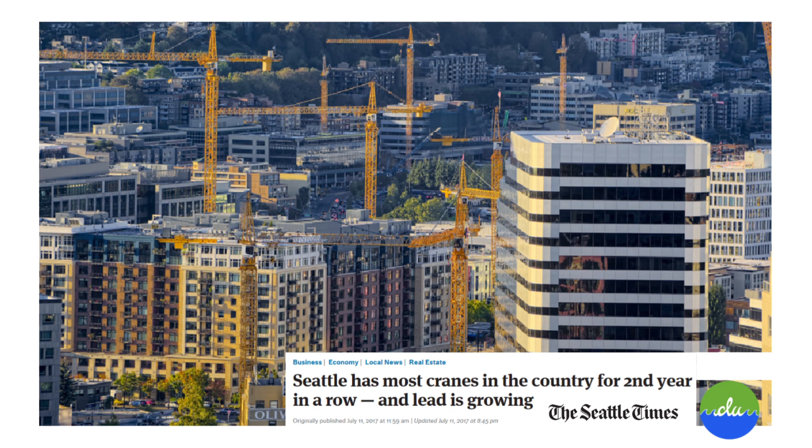This is right by my office. There's a marina there and you can see the oil slick in the water. As part of running that marina, we have to have a best marina management plan. We saw that oil on the water and we're like, what is going on, where did this come from? Get our spill kits out. We thought an engine was leaking.

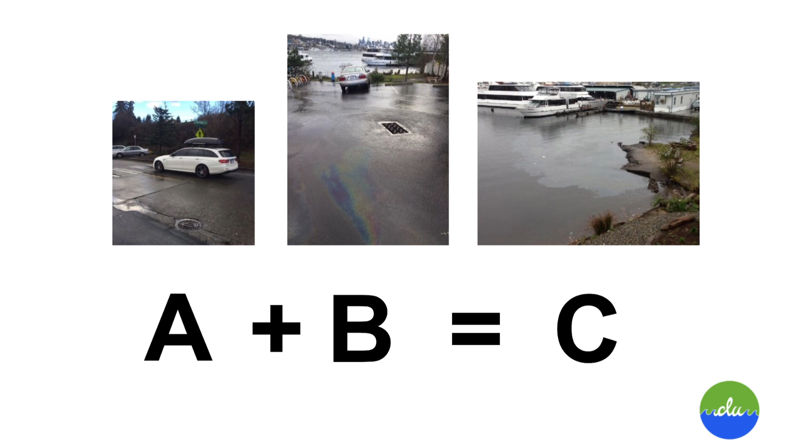We came to find out that it wasn't an engine leaking, it was stormwater. This is as simple as it gets, but you can see the storm drain was doing what it was supposed to. Unfortunately, there's no filtration in these stormwater systems. This drain right by the office, you can see the oil slick going into the drain, and then the water in the background, that's the oil slick from that water. With all the development going on, we knew that there was a problem.

Jeremy, this is back in 2013, probably 2012, said, hey Mark, you should look at this video. Jen McIntyre, she's a professor at WSU, and in the video, without going into it, they were taking stormwater off the 520 bridge and sticking juvenile salmon in that stormwater. The salmon would die within minutes, just because of how much toxic material is in that stormwater. Jeremy said, what can we do about this?

This is an email from Jeremy to me, October 28th, 2014. It just says, I know it might be a long shot, but please send me a photo of any dimensions. Seattle also has, in addition to a stormwater problem, combined sewer overflow. Our pipes in the city of Seattle are really old, 80, 100 years old, and they haven't changed. You saw those cranes, we've added a lot more development, so there's a lot more sewage going into those pipes, and when it's combined with stormwater...

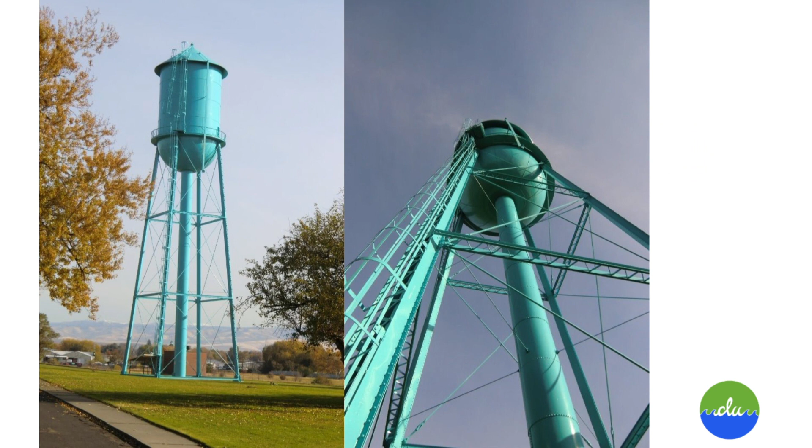you've got a problem. In our development project, this is that water tower we were talking about. We were going to build a building and cut off the legs of this water tower that was going to be demolished, paint the top of it pink, put it right next to the Aurora Bridge, and hold the stormwater coming off the Aurora Bridge in this tank. While it rained really heavy, that overflow water is what makes sewage go into Lake Union, because our pipe is the same size. The rainfall's pretty consistent, we've added all this development, so when you add the sewage and the stormwater together, it overflows into our lake.

Our thought process was to take this tank and make it a holding tank. When it's raining really heavy in Seattle, we'll hold the stormwater in here, allowing the sewage to do its thing normally. Then when it stopped raining, we would release that water out. We were going to paint it bright pink and put it in our building and say, crap happens, but not in Fremont, and count how many gallons of sewage we prevented from going into the lake.

This led to a bigger problem. The property we were looking at was not a combined sewer overflow area, the pipe is just stormwater. Jeremy said this is actually not a bad thing, because the bigger problem is actually stormwater, which Jeremy is going to talk about now.

It's intuitive to a lot of people that when sewage systems overflow into our waterways, that's a bad thing. Seattle has been able to rally resources and improvements to improving our combined sewer overflow situation. It's a little less intuitive, but arguably substantially more consequential: the untreated and polluted urban stormwater runoff from our roadways that goes into all the water around us, not just this corridor, but this is one we focused on initially.

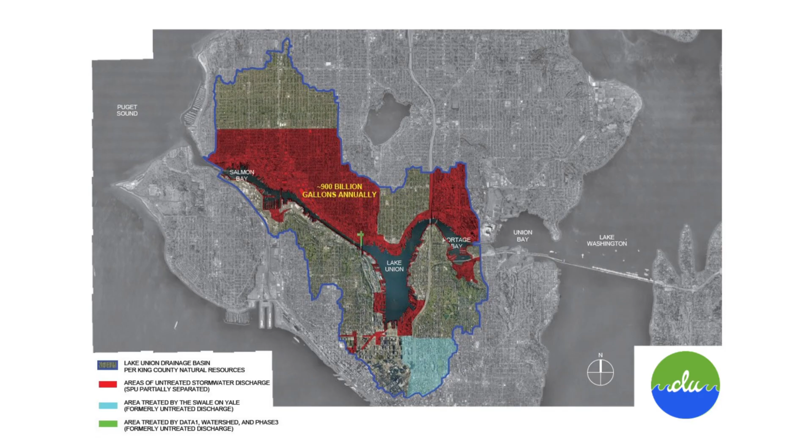The challenge with urban stormwater runoff is salmon in the Puget Sound are running in September generally, late August to early October depending on the species. And when does Seattle get its first heavy rains each year? Usually late September. So you have sometimes 30, sometimes 60 days of soot, sediment, rubber, and heavy metals accumulated on the roadways. You get that first heavy rain in the third or fourth week of September, and it's all going out these red points around Lake Union and the Ship Canal. There are hundreds more on the Duwamish and around Elliott Bay, Lake Washington.

To emphasize that a little more, this is actually on the street we're going to focus on here, Troll Avenue. If you've walked down the street from the Troll, the civil engineers in the room might have noticed the pipes coming down the columns that just dump right into the curb, like you see right there. That cup of water is literally held right under that downspout. It's normal, it wasn't even like a first flush.

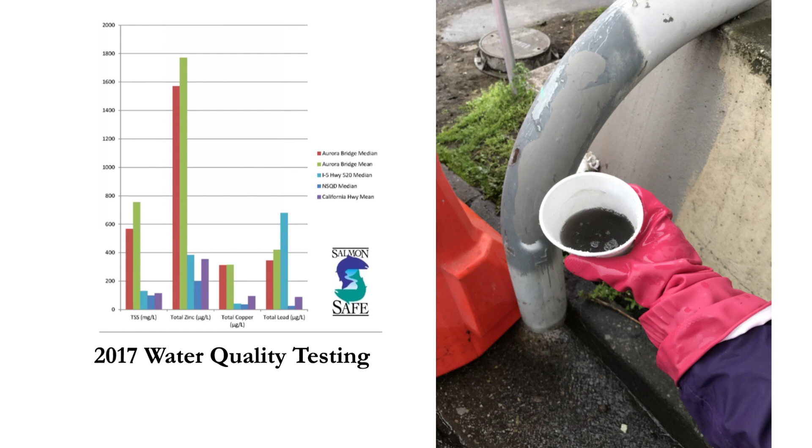Salmon Safe did some actual water quality testing of the material and of the water we were getting off these downspouts, then benchmarked it against I-5, Highway 520, and California state averages. There are a number of theories why, and we won't try to explain, but for whatever reason the Aurora Bridge, shown as the green bars, tests consistently higher on most of the measured contaminants than each of those benchmarks.

So this is one of our first projects, back in that 2012 timeframe when we started looking. This was the site: here's the Aurora Bridge, here's the canal right here, and the outfall is right here for all this stormwater that comes out. This was a rendering of the building.

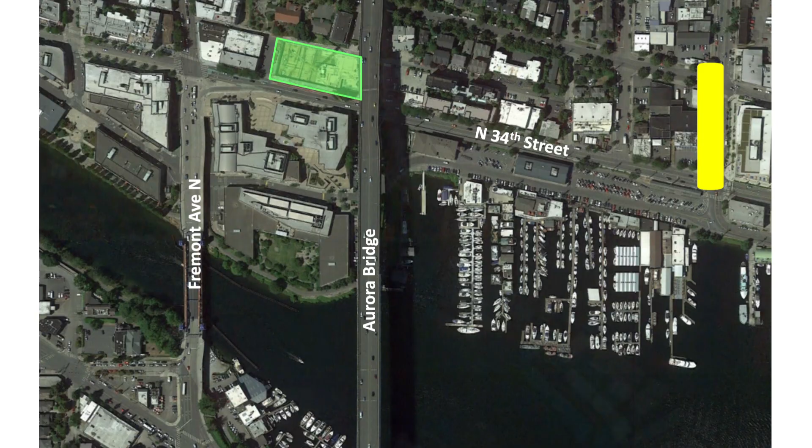You might know it if you've been to Milstead Coffee in Fremont, or Pokey's, or Cafe Turko. So this is the right of way right there, and we have slope here, so we put in a series of bioswales. Again, you can see the water in the background. What's interesting about this, people would ask, how do you do this? How does this work?

What's really interesting is we're taking water off a state freeway, cleaning it in the city right-of-way, then discharging that water back out into the same city system, and then back out into the lake. To make this happen legally required a lot of work, so if there's any attorneys in the room—the state attorneys, the city attorneys, and the Department of Fish and Wildlife were saying you can't do this. A private developer can't take the water, put it onto private property, and clean it. So what we ended up doing is we built all of this and gave it back to the city.

But this was just an asphalt area. This was a dangerous area. There was graffiti here, lots of things. This is now, you'll see here in a few slides, all improved.

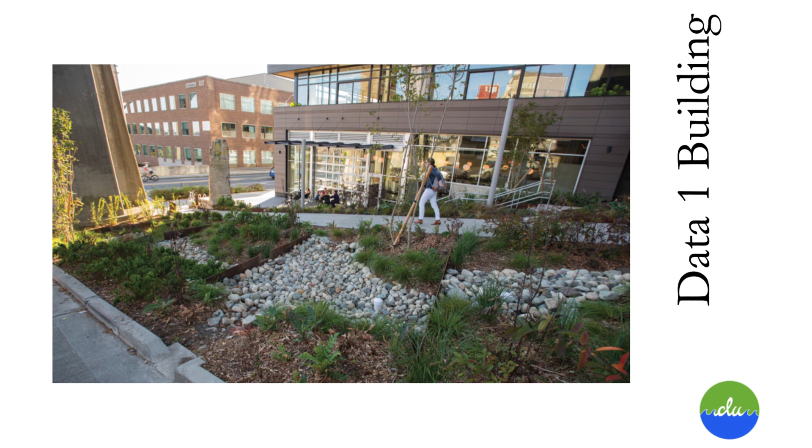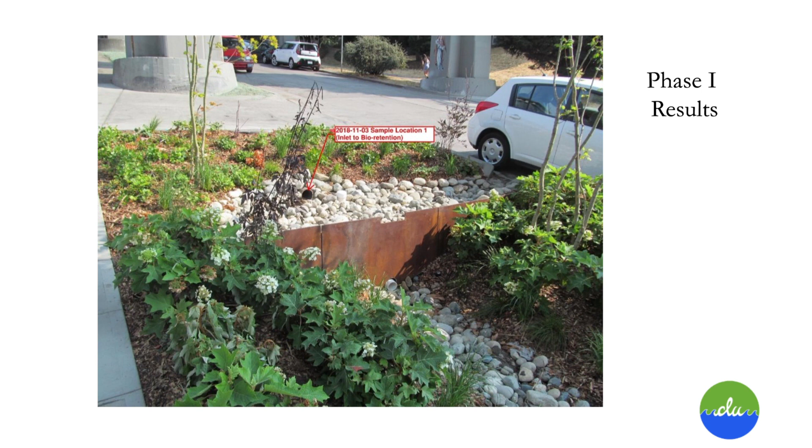And here's the finished building, and here's the bioswales that were installed. We took the downspout off of this column, and it goes underground, outflows here, cascades down through, and then comes out through this downspout. That's the before water, similar to what Jeremy just showed you. And then coming out the second time, that's what it looks like after going through one bioswale.

Pretty cool. What I love about this is a 5-year-old gets it. This isn't complicated science, nature's doing its job. We have a series of 7 bioswales, and the water very rarely gets to the bottom, meaning nature's doing its job. This building went online in 2017, and we've had to change out the soil once.

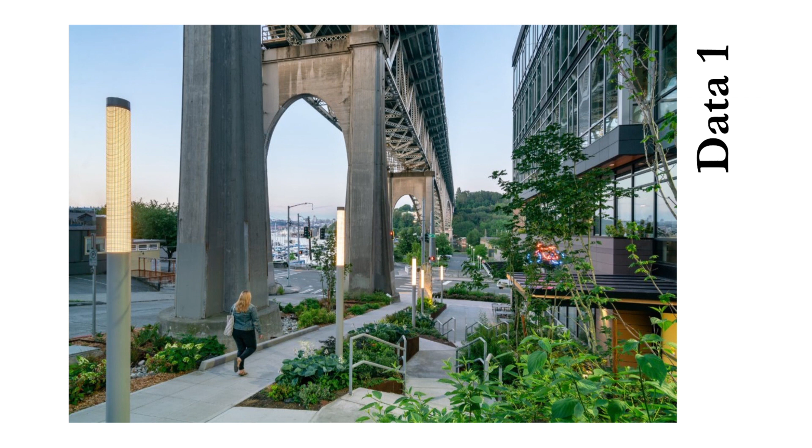So really exciting stuff. Again, here's the same thing, the completed bioswales all along here. And this is city property. And then visually, again, here's the Aurora Bridge.

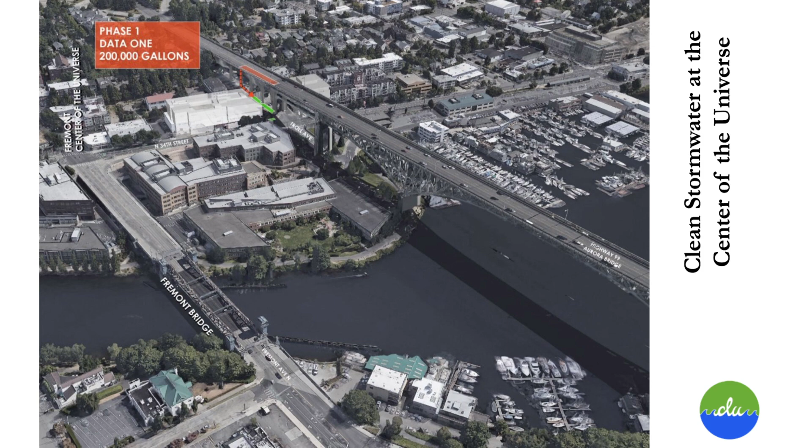That one downspout captures this much stormwater, right? So I think everyone can nod their heads and say, well, there's a lot more opportunity to capture more stormwater off this bridge. And that's what we did, and Jeremy's going to talk about it.

Oh, here, I'll skip over this. It was pretty exciting that after we did this first test, we got a lot of positive feedback. The Puget Sound Partnership did a study on it. Someone from the EPA said they wanted to do a study on it too. We were really excited about the momentum we had.

And so we built another building across the street, which Jeremy is going to talk about now. Yeah, so Mark calls and says, we're looking at the property across the street. We were only able to get one downspout, and it was like an unprecedented kind of move there. There are almost no developers in Seattle saying, how can I volunteer to treat 100-year-old pollution problems in the city?

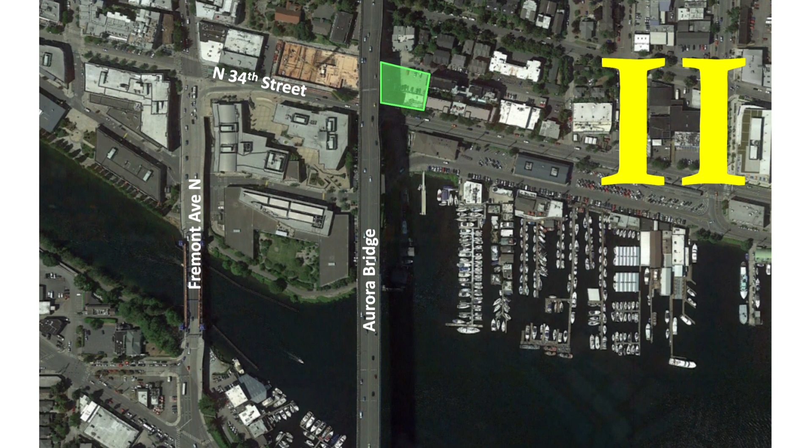So we've got development across the street that Mark's looking at, and now we're excited—we've proven it can work, and we want to go bigger. On the development, on the building side, the architect team and Mark's ownership team said, this is the living building pilot project: water reuse, light adjusting windows, just everything you could think of—how can we make this the greenest building possible.

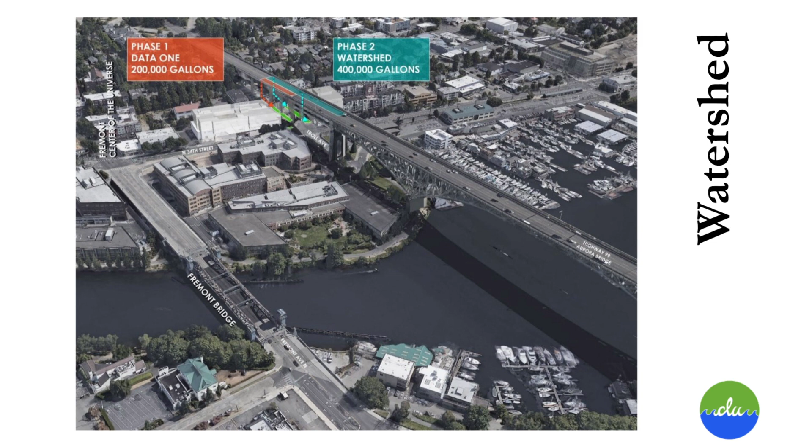But on the stormwater side, we were looking at the same situation, finding here we could hit 2 downspouts. We could capture twice as much water as we did on the opposite side. So the 2 downspouts are capturing more of the Aurora Bridge and that contaminated water.

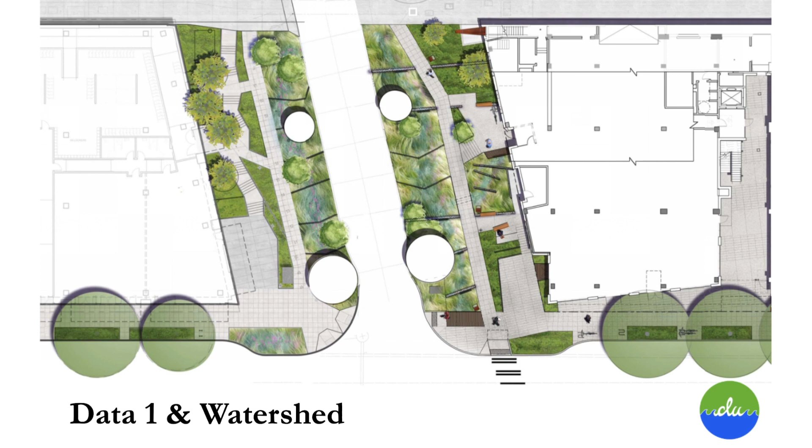So like Mark was saying earlier, if any of you can remember back here, this was a difficult area under the bridge. It was dark, all asphalt or concrete. Now it's a vibrant, urban, park-like boulevard with urban nature and green space brought into the city.

You could see, I mentioned they did everything on that building, even bees on the roof, and all the finished green space with those same-level pools kind of stepping down the hill. The water recirculates between each one now, on both sides of Troll Avenue.

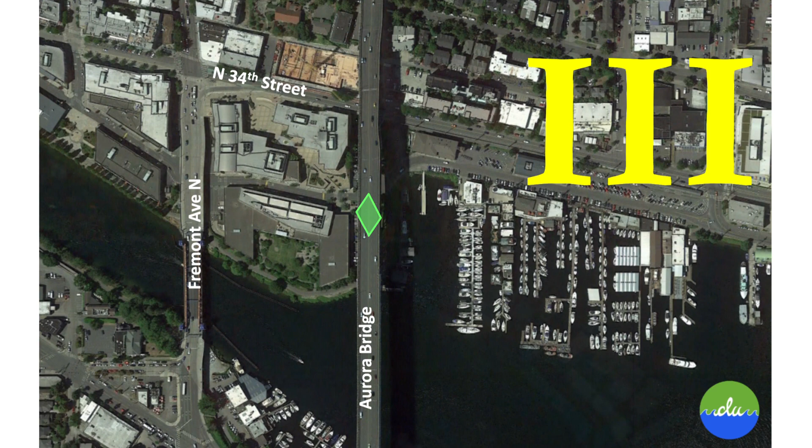And then we said, why stop there? So phase 3—Mark happened to also be the property manager for a large corporate collection of corporate campuses down on the south side of 34th. That's the Burke-Gilman Trail on the right, sweeping under the bridge there.

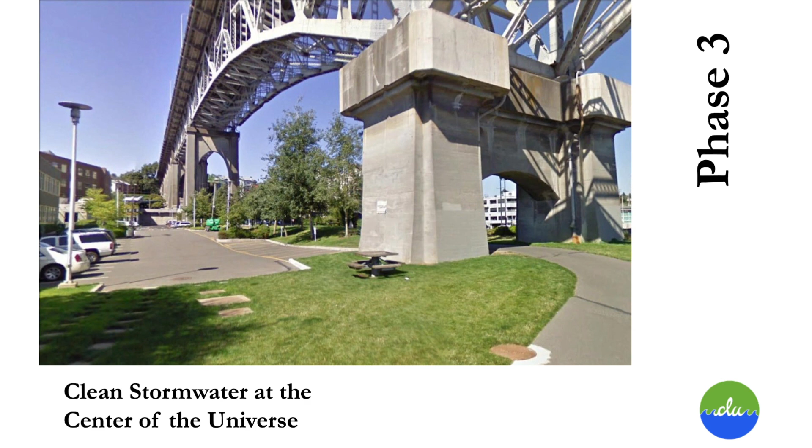A number of you have probably been down through there, but it looks different now. And this was kind of an inspiration for us.

Mark mentioned a lot of the gymnastics of trying to get through a wide range of regulatory agencies to do some of these things. One of the challenges was competing land uses and the perception that you can't have recreation and technical stormwater landscape together, that one precludes the other. So an inspirational project we held up a number of times was the Tanner Springs Park in the Pearl District in Portland.

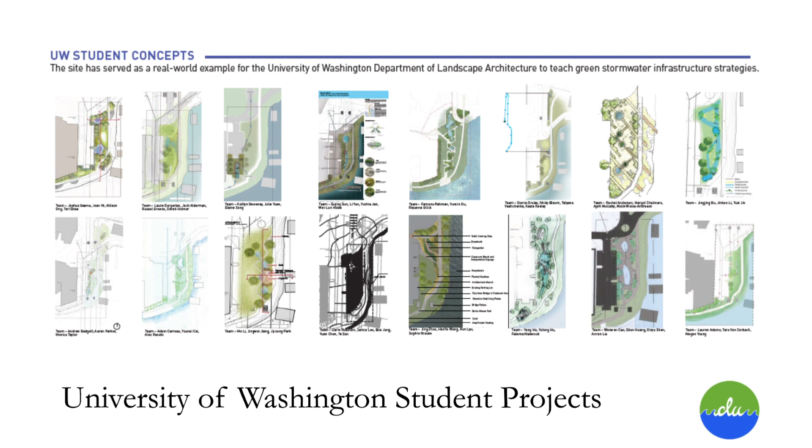With all the excitement that had been generated by this time, the UW Landscape Architecture School actually made this a senior project for one of their classes, and went through a wide range of different landscape possibilities for how we would duplicate this under the bridge. These are all different designs from University of Washington students.

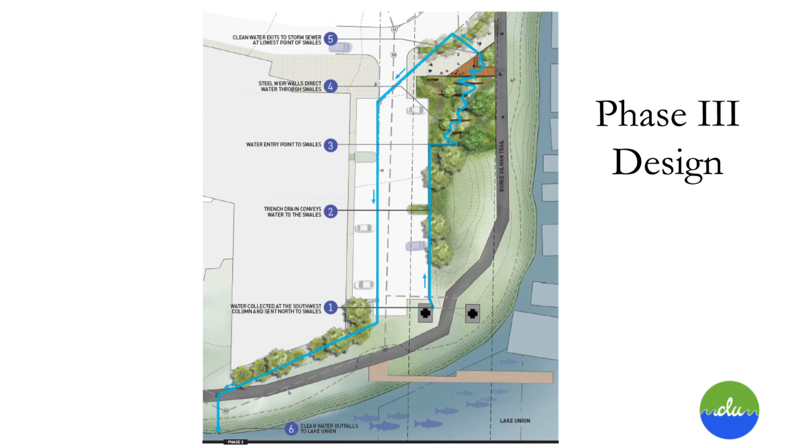Okay, so phase 3, now this was a much bigger move because down here we could capture 5 downspouts. We mentioned 1 on phase 1, 2 on phase 2, and then we could capture 5 more on phase 3. And what you'll see here in a minute is we carve away this turf hilltop that's there.

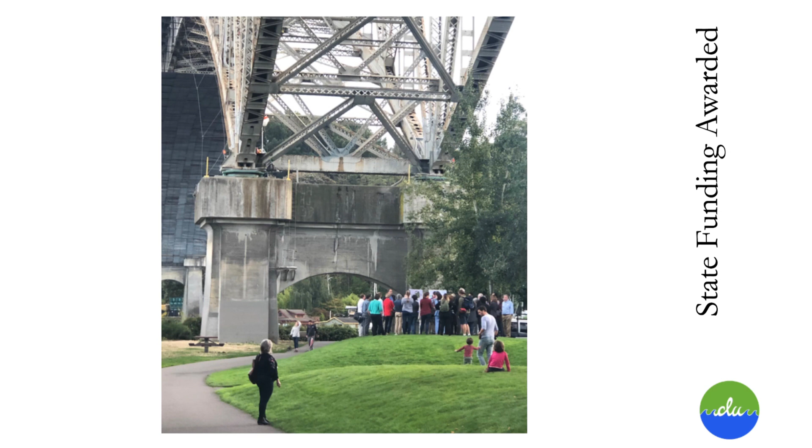This is us meeting out there with a series of state senators and representatives and local politicians, talking about how to raise money for this. Under the governor's Orca recovery initiative, this was one of the first projects funded. We got $500,000 from the state to help build this thing.

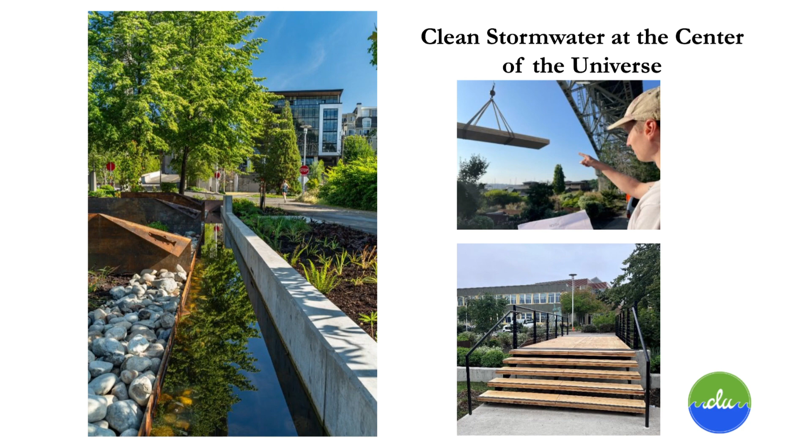A project that Mark will talk about here in a minute, what we call phase 4. This is a cross-laminated timber, CLT, bridge that was donated by that project to create additional park and amenity space integrated with the stormwater mitigation here.

And now, combined, we're treating close to 2 million gallons of runoff with all roof and bridge downspouts combined here. What's exciting is, I mean, this is a bridge, right? There's bridges all over the world. So this is a replicable concept.

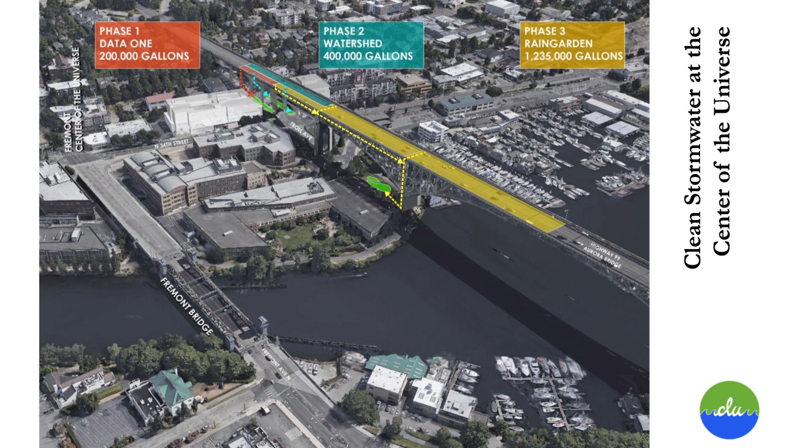And what we're going to show in the next phase is that it doesn't have to be related to a bridge. I-5 is amazingly dirty, and all that water from I-5, from Green Lake all the way to 45th, outfalls right there by Ivar's on Lake Union. That's a lot of stormwater.

So just driving home the point, this is the tribe. They annually put a gill net out right here in the fall. And Jeremy mentioned that first flush.

Think about it, our roads are dry all summer long, and that first rain happens in September. Guess when our salmon are migrating? Right, so the salmon are running right through here, and this is only here for about 3 weeks. That's the water that's coming out, and it outfalls right next to this net, which is sad.

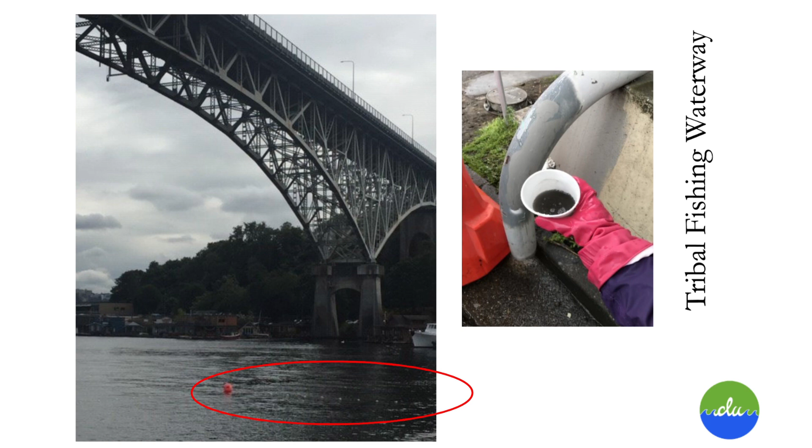I was talking to someone recently who was looking at it and said these numbers are a little bit off, because a lot of the salmon are getting into the lake, and Lake Union is so warm that they're turning around, they're not even making it to the river. So again, a little asterisk next to that.

This is phase 4 that Jeremy was just mentioning. This is North Lake Commons. It just got completed here in the last 2 months, right by Ivar's. I'm going to speed up because I think we're getting short on time.

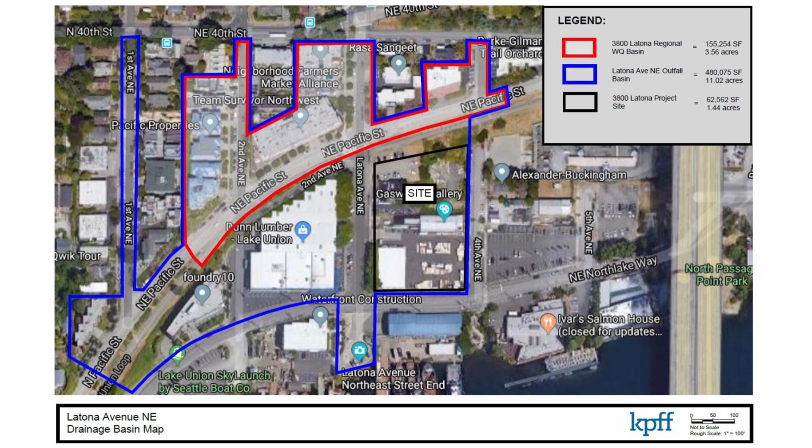What we did here is we took the neighborhood stormwater, and here's the site. All the water that hits this area outfalls right here, and we put in a bioswale. The water normally would come down this track right here and straight into the lake, and we installed a shutoff.

The plants are just maturing right now. As I mentioned, the building just got done, but we're going to let them mature throughout the summer. Then probably in July or August, we'll do the shutoff and route the water onto our property, clean it through a bioswale, and then discharge it back into the same city system that previously existed.

So what's unique about these four different phases is the first two were done privately, but on city property. The third phase we got state money, and the Boeing Foundation got involved, Adobe got involved, and we raised money and built that one.

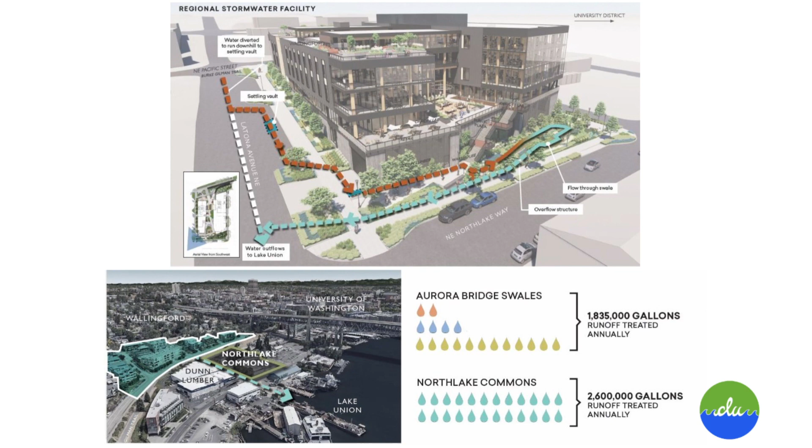Then this fourth phase was done privately, but we worked really closely with Seattle Public Utilities. Because the city needs to clean their water as well, the city is giving us a six-figure check to do the stormwater cleaning on this property. Why did they do that? Because this is private property and we're putting their systems now on private property. But it's really cool to see the partnership take off, and Jeremy's working with another developer that's now doing it, which is the best compliment we could have - more people are starting to do this.

That's all we have. There's a lot more. I put this ending slide kind of halfway through the presentation. But I should mention too, you can see CLU, Clean Lake Union.

Jeremy and I, as part of this, right after we did that first phase, started a nonprofit called Clean Lake Union. We do a paddleboard race annually to raise awareness. We start in that same area where that first building is, rent paddleboards and go to Kenmore and back, and raise money. So if any of you wanted to get involved, we'd love to hear from you and come down and support the race.

And then there are smaller versions of this. Again, we have a whole other deck behind this. We're in for permit at that first spot where it started, that aha moment. We're going to put a bioswale right there on a waterway - Eastern Avenue street end. So there are opportunities to do smaller scale of this as well, and go bigger and go worldwide.